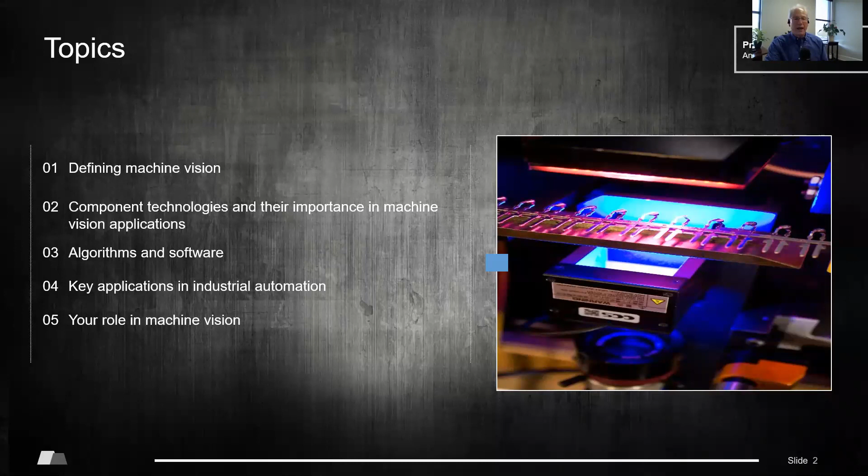So to get started, I've hopefully trimmed it down to enough topics. I have been criticized in the past in that I can speak on machine vision forever, so I'll try to limit myself, and I've got these 5 topics. Defining machine vision, how it differentiates itself from other particular technologies, component technologies in machine vision, because that's a lot of what we focus on, algorithms and software, some key applications, your role in machine vision, and I have some code for you to look at and some examples that I think you'll find pretty interesting.

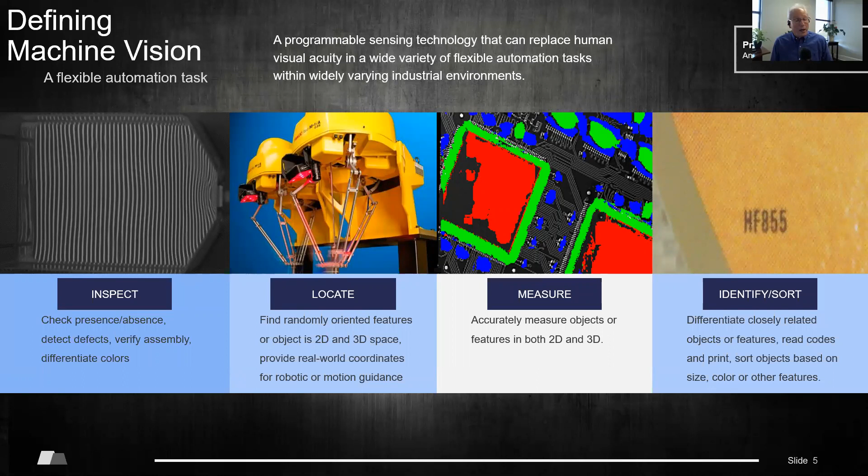Why is that? Well, it's really that the venue in which machine vision operates, an industrial automation venue, lends itself to that sort of thing. That's what you do in industrial automation. We're not looking at a real world scene. We're looking at a constrained scene. We're looking at constrained objects, usually running by almost one at a time, unless we get into some real interesting applications in robotic guidance and the like. So that's really where we might start our thought process in differentiating the task.

As we define machine vision, because of the way it is a technology, we tend to focus on the components. Now, software is critically important. I'm going to get into that, but we tend to focus on the components because these are the things that facilitate and enable us to see and to acquire the images of the scenes that we have to do. And they have the industrialization and the resolution and the quality of image that's necessary to do the very, very discrete digital imaging of the features that we need to see.

You don't see very often, if at all, USB webcams and the like in a machine vision application on an industrial floor. But the technology is really, as a description, just a system of components using software tools. In machine vision, we're talking about a process that digitizes the image, or transfers the image, analyzes the data, and then returns the desired result. And the physical architecture varies somewhat, and I'm going to get into that. But other than that slight variation in physical architecture, the rest is all over the board, and I hope to give you some information and a description of what that is.

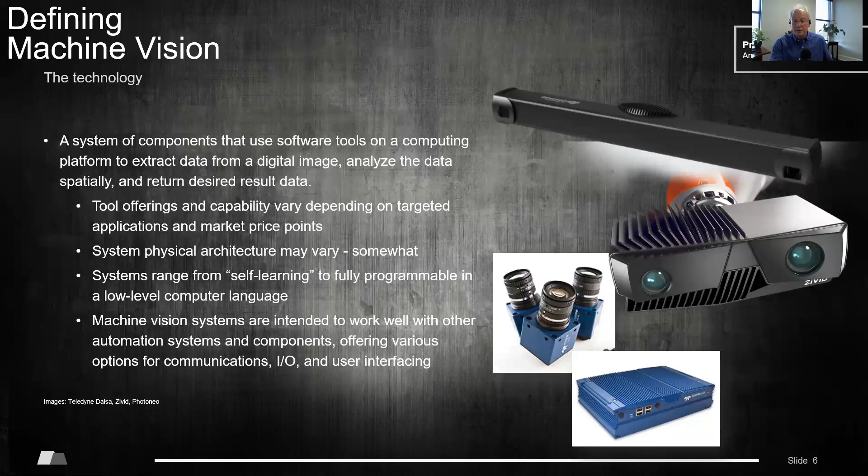So let's talk about this subtle architecture comparison. And this is the same for computer vision, really. You need illumination. You need optics, unless you're into that heavy R&D research into computational imaging that's lensless and single pixel points. And I love that stuff, but we don't do it in machine vision at the moment, maybe someday looking around corners with imaging devices.

And then you need a camera, an imaging device. It has a sensor, it has electronics. You need a computing device. If we look at an industrial PC architecture, this is what you come up with: light, optics, camera, and computer. And that computer then communicates with the real world.

Another huge component in the machine vision marketplace is what this industry calls a smart camera. But the thing that's interesting about a smart camera is it has the same architecture internally. There's a lens that goes on the outside. There's a light that might be embedded in the camera, but there's still an imager, electronics, communication to an interfacing device, and digital image processing.

You might write your program right on the computer inside the smart vision camera, or you might use an external computer linked to it via Ethernet to configure the inspection on that camera, or even upload a custom program. And then a hot topic in machine vision and really everywhere, because this is more leaning towards the computer vision industry, things like autonomous driving, driver assist, autonomous mobile robots or AMRs, is the idea of embedded vision processing.

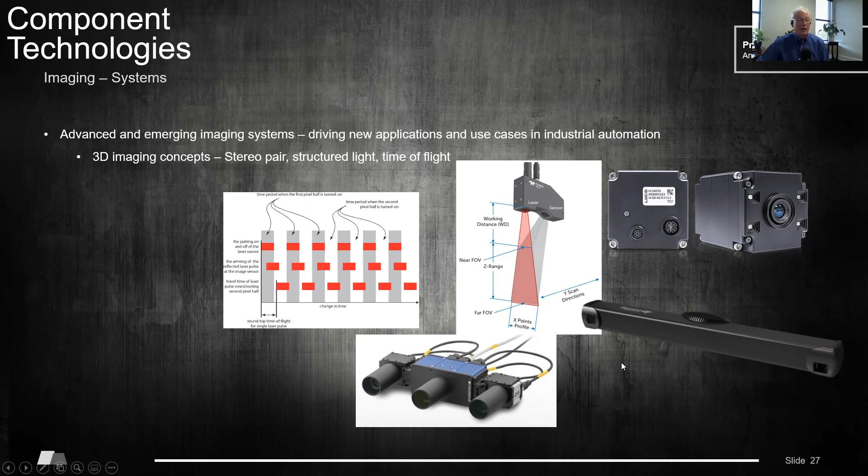Time of flight, I might add, is something that you'll see bantered about in autonomous vehicle in computer vision. It's not as good as point source LiDAR, but in some ways it is. And so we see that bantered around in what's going to emerge as the imaging for that.

How about imaging things that you can't see? How about imaging in near IR, which is about 700, 900 nanometers. You can't see it, but it reflects off of objects. And it highlights things that are unique and that you wouldn't expect to be highlighted by visible light. But then we get into shortwave IR, which has become very popular due to the availability of more and more sensors in that area.

Shortwave IR can see features on things like fruit or a lot of features. In fact, shortwave IR is one of the wavelengths that we often use in hyperspectral imaging to classify objects. But shortwave IR, just an interesting tidbit of fact, penetrates opaque plastic. This is an actual detergent bottle. It's a laundry detergent bottle that's green or something, and it totally penetrates that bottle so we can see the liquid level in between.

And then also with thermal, we hear a lot about thermal imaging right now in terms of applications in health monitoring and so on, elevated body temperature, core body temperature, and so on. But thermal imaging has a lot of uses in machine vision. We've used it, for example, to detect seals underneath a cap.

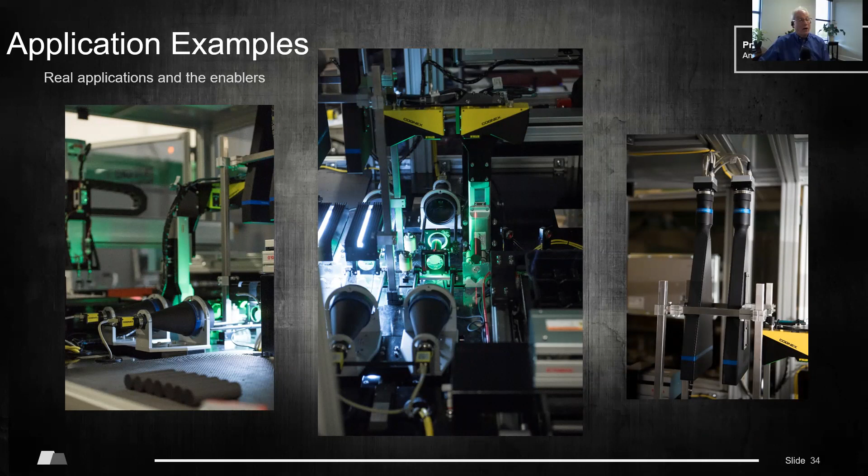Any thoughts why? I won't put up another poll, but think about that. 10 seconds. Okay, because two reasons. Number one, it turns out that green worked well with these parts. We selected monochromatic light and it worked well. But the second reason is, if I'm doing metrology, using a light that has a shorter wavelength causes less interference pattern between the light, the object, and the pixels, and a more accurate measurement. So we often use blue or green in a metrology environment for that reason.

Another one that is also metrology, here we're looking at, for both an endocentric and a telecentric lens, measuring defects in a small medical filter here. This is looking at, and I don't know much about these kind of things, but this is tobacco candy. But we're looking for defects in the tobacco candy on a glass tray.

Sometimes the part handling is even more complex than the imaging. The imaging here is pretty hard. We used what's called a pericentric lens that sees around corners, which is really fancy, really interesting stuff. But we had to put the part on a glass tray in order to look at it both from the top and the bottom and make that successful.

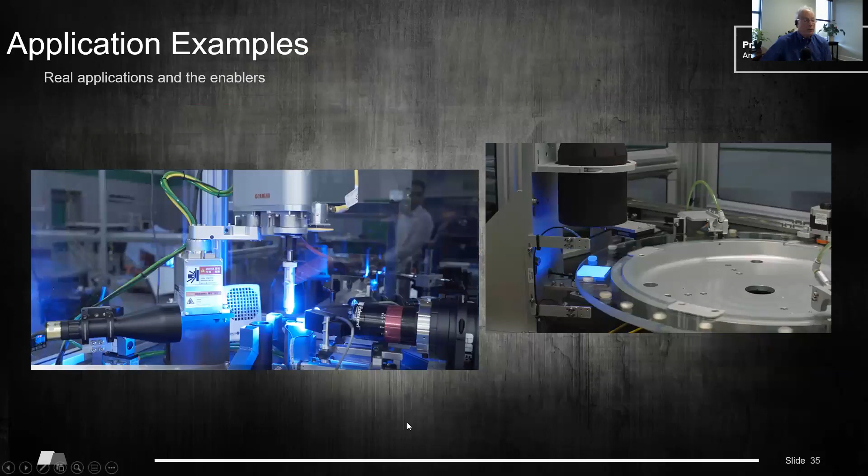Here's one I really like, golf balls. I don't know about you, I like to golf. People collect used golf balls, but the people who do that and sell them want to know what kind they are and whether or not they're damaged. We developed a system that had 16 cameras. Well, this is more than we actually had, but this was the initial design. The ball falls, in free fall, through the middle of the cameras, and all the cameras take an image at exactly the same moment in space when that ball hits the middle.

And why all the cameras? Well, because we had to see all the permutations of where the textual features were on that ball to make sure that we identified it. It's not just the word Titleist. There's other text on there as well. We did work with CNN deep learning on this. It turns out it had a lot of trouble with random features. As one might expect, you can't train out all the random features in your data set. So we ended up with discrete imaging for this.

Let me show you a little snippet of this code right here. It ended up being massively parallel processed in order to get the code to work. And it used something very interesting. It used a search, but an extremely sophisticated search called a deformable or a distortion model search. Like a simple search, let's say an extension of a Hough transform, but what it does is it searches in complete non-linear variation of the model. So you train a model and then it can search for that model as it varies non-linearly.

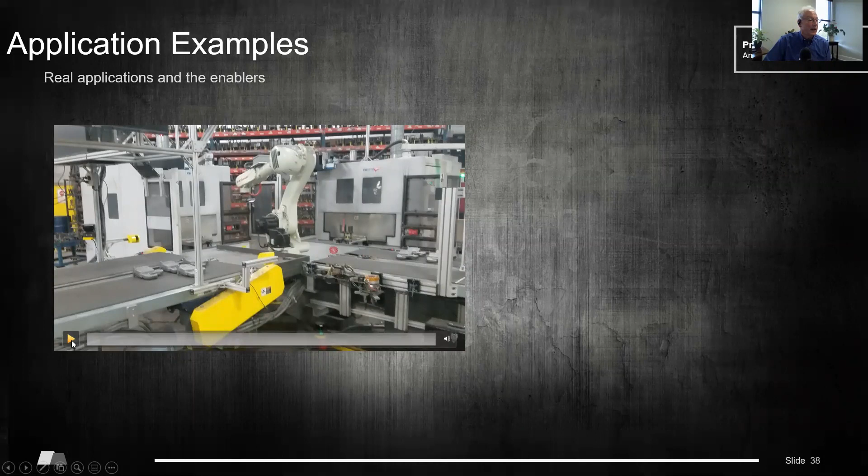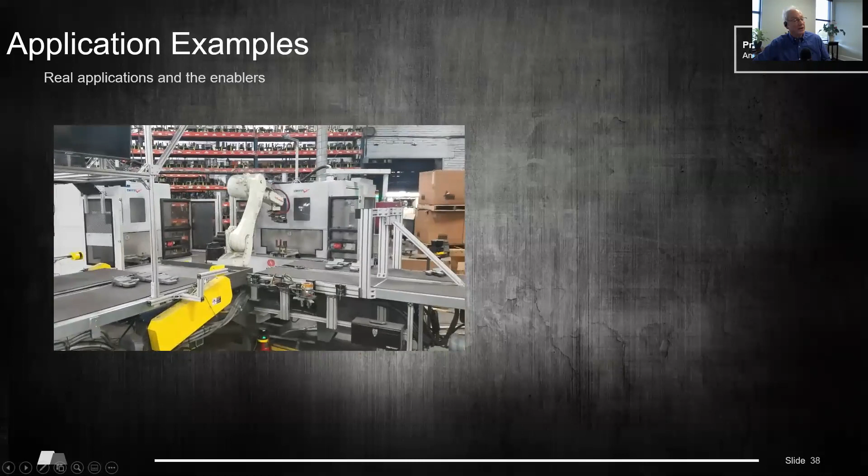Robot guidance. Real applications and their enablers. Robot guidance, this is pure 3D imaging. We're finding those parts no matter how they lay on that conveyor, sending a 3D point to the robot, picking the parts up from that 3D point, and having the robot load them into a machining cell.

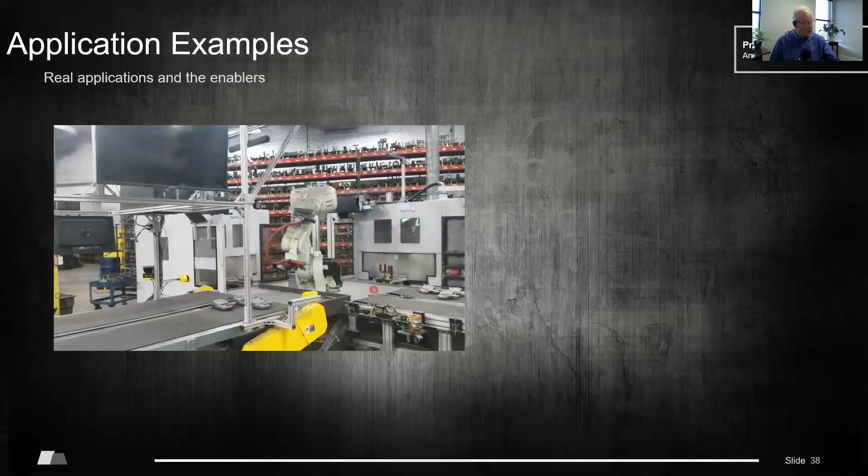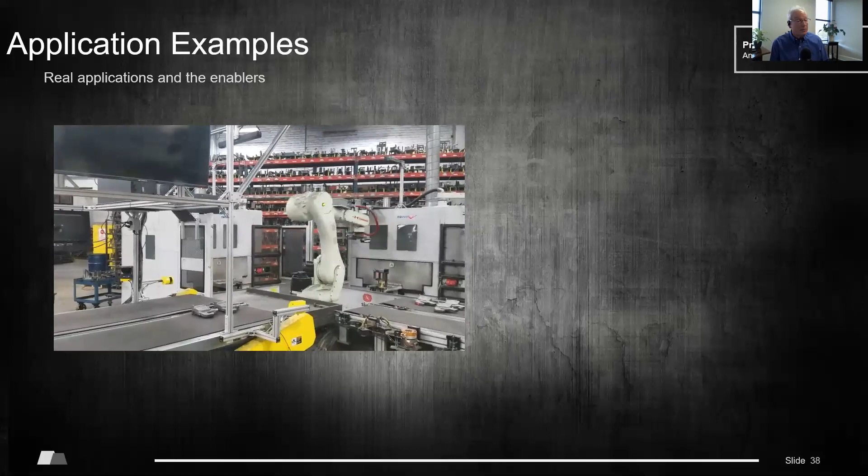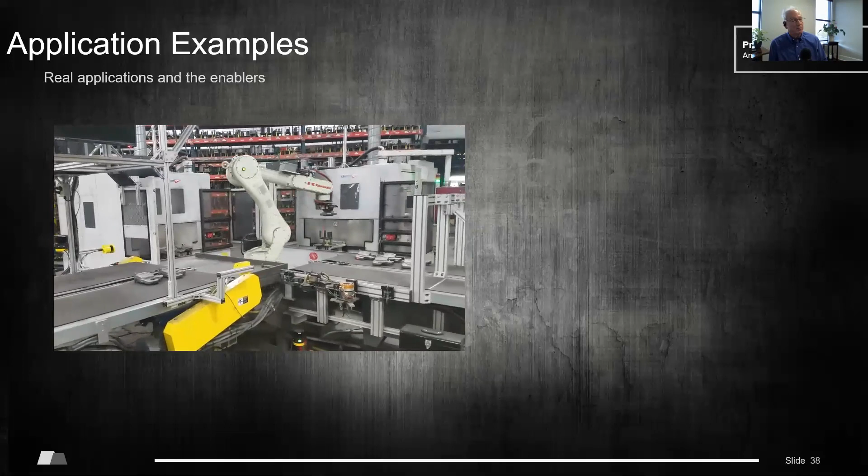This is fairly standard 3D, but in relationship to 2D imaging, this is a highly complex application, but nonetheless doable. What we use in this application is, again, discrete image processing, not learning. We could learn a model. We could even train a model from CAD, but in this case, it's more straightforward to use a 3D search, which is, again, a super sophisticated search that operates off of a dense point cloud or a sparse point cloud, but in our case, a dense point cloud, and finds the object via a surface match in 3D.

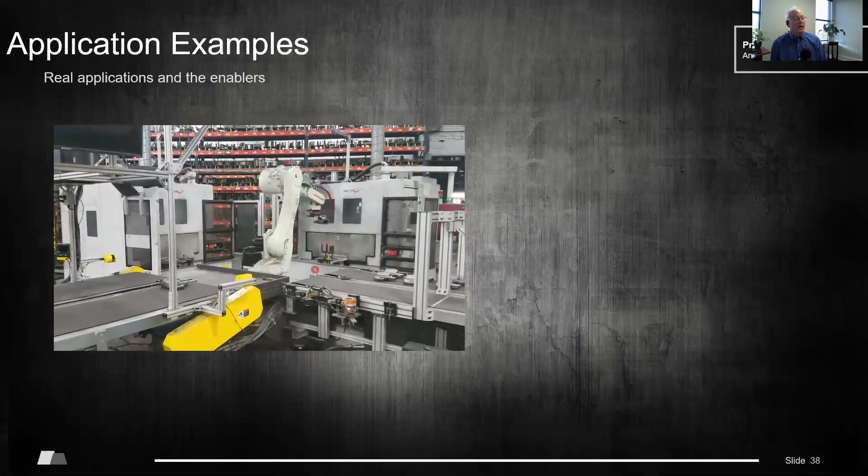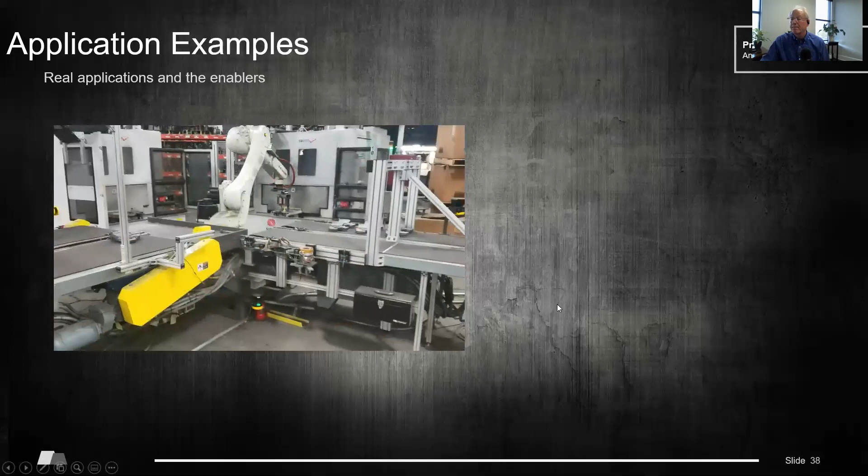Fortunately for us, the object is always facing up. If it were facing down, we'd have to train two surface matches for this object. And having said that, one more quick example. I just want to show you 3D imaging in action. This is actual live imaging.

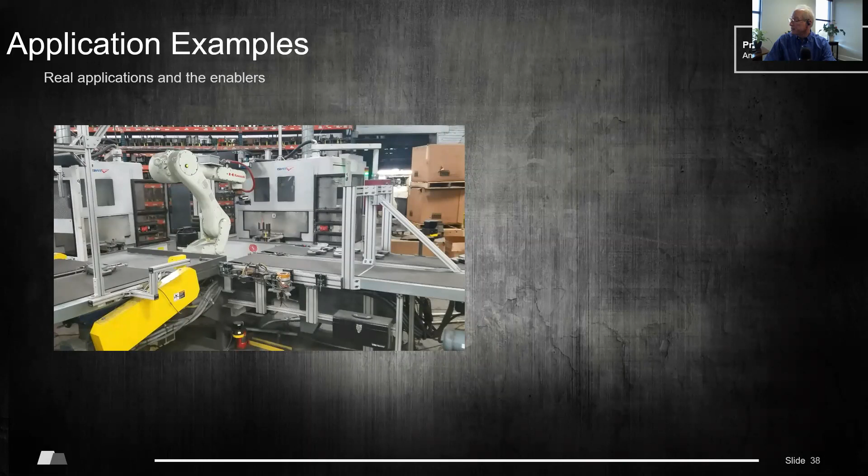These are flats. I'm able to use primitive plane analysis of the 3D point cloud to get the average planes over the stacked objects. And I'll show you one more image of that right now. One more similar application where you can actually see the result of the stacked objects. This is in a bin, picking objects out of a bin at all random locations.

It turns out that it's still the same image, but nonetheless, you get the idea, and it will clear this entire bin by looking at the object. Now, what about an object that's standing on its end? You know what you do in robotic vision for that? You find the highest point, take your gripper with the vacuum cup on it, and you don't pick it, but you go and touch it and tip it over. And then look at it again. Tip it over until it's flat and look at it again.

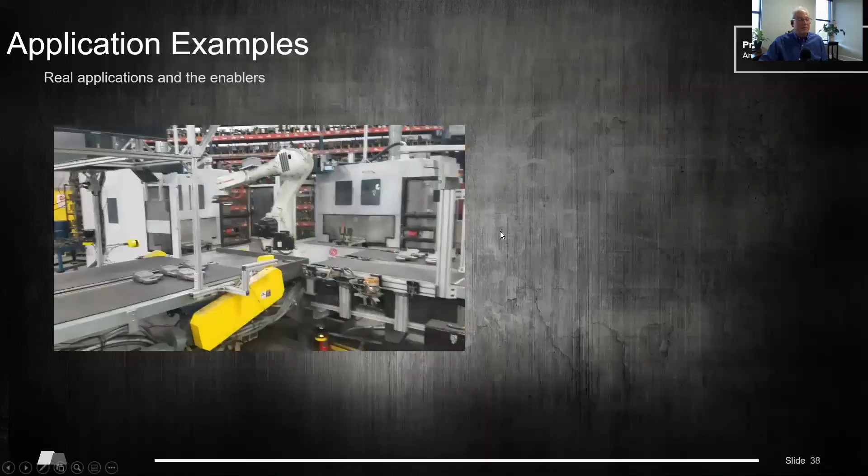So, okay, that's about all I've got. Let me leave you with one word. What about you in machine vision? What about you and what you can do in machine vision, and I'd always be willing to help anybody looking at machine vision for a career. Your potential role. Where does the machine vision industry stand here?

What do we have? We certainly have component manufacturers. These are the people who do the R&D. They develop the components. They have R&D staff, particularly people who do software, have huge R&D staffs that do nothing but write algorithms and debug algorithms all day. And they develop the technologies that come into our marketplace.

Now, we develop the end product, which in a way is just as much R&D, as you can see from the code. But all in all, we have the component manufacturers who are making that 3D camera, for example, and making it work. And they have experts in optics, experts in lighting, experts in 3D, experts in code. And that's a big part of the industry.

There are systems manufacturers who don't necessarily make a raw component, but they deliver a configurable system. We call these application-specific machine vision systems. This could be smart cameras too. It could be a system, for example, in the electronics industry. These have been around for ages. We call them chip spitters or chip shooters.

What they do is they take these tiny microscopic chips, you've seen them on electronic boards, and they use a microscopic gripper on a robot, and the robot picks it up. The vision system looks at that, finds out where it is in the robot grip, finds out where it's supposed to be on the board, and puts it on the board at rocket pace. Hence it's called a chip shooter, because when you're standing next to it, it kind of sounds like a machine gun. These little parts. And then we have solution providers.

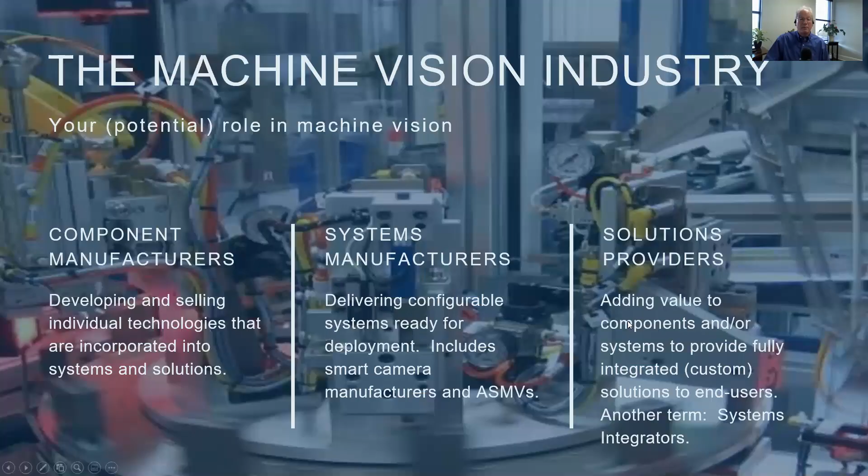I know David covered a lot of stuff, and I'm really glad we had David join us now, because we haven't had a chance to get into a lot of the hardware stuff at the end of this course. It's a little bit backwards, but we will do some stuff on cameras and lensing and stuff like that. We're kind of starting with the algorithms, but I think that was hopefully a cool introduction to all the stuff you can do with cameras.